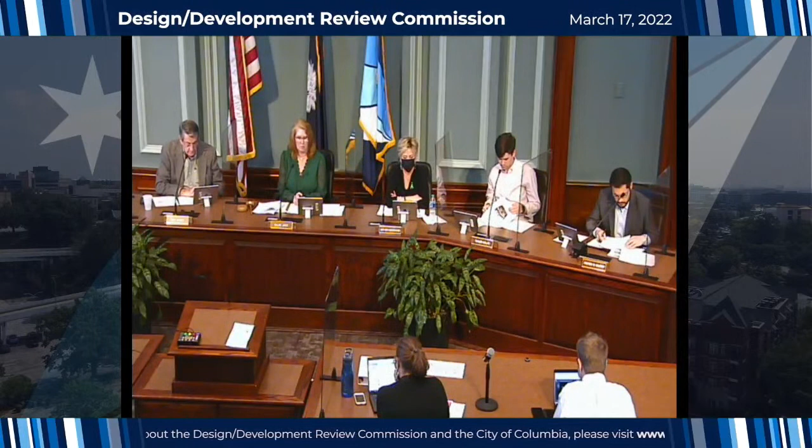And I will call the roll. Ms. Branham? Here. Mr. Broom? Here. Ms. Jaco? Here. Mr. Salibi? And Mr. Wolf? Here. We have quorum.

In order to avoid ex parte communications, DDRC members are under strict instructions not to discuss cases under consideration with the public or with each other outside of the public forum. The meeting typically starts with staff calling the case, giving a summary of the project, and then calling on the applicant to present if they wish. Decisions are typically made in one evening. Decisions may be appealed within 30 days to a court of competent jurisdiction. Oaths will be administered individually as we hear either from applicants or from live speakers.

Applicants with requests before the DDRC are allotted a presentation time of 10 minutes. This time should include, but is not limited to, an overview of the project, case history, and any pertinent meetings held regarding the request. The time also includes all persons presenting information on behalf of the applicant, such as attorneys, engineers, and architects. This time limit does not include any questions asked by the DDRC or staff regarding the request. Members of the general public are given the opportunity to address their concerns in intervals of 2 minutes. Applicants may have 5 minutes to respond. Staff has a timer and will make presenters aware of when their time has expired.

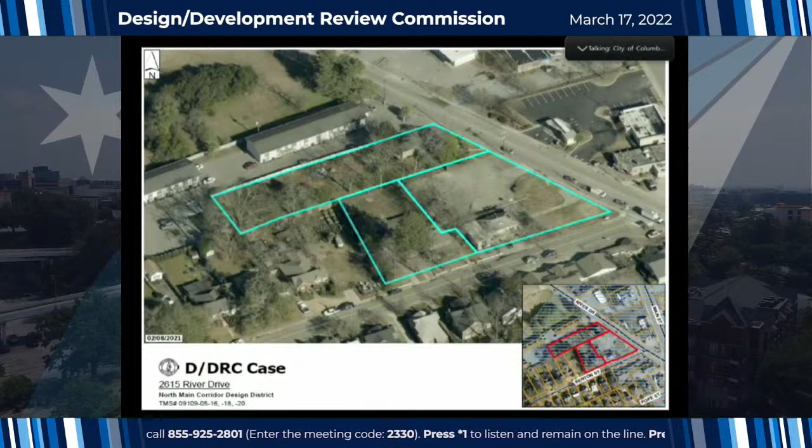The building is V-shaped, with residential units above parking on the ground floor and some surface parking in the rear along the north property line. The project received conditional approval at the Planning Commission for a site plan on March 10th. I'll read through some of the staff comments and the staff evaluation, and then I believe the applicant is here to present the project in more detail.

Under site planning and parking placement, the building is primarily sited appropriately, addressing the street frontages and the acute angle shape of the lot with narrow setbacks in the building footprint. While the surface parking is largely screened from the right-of-way by the building, the ground floor is mostly parking behind metal screens in place of storefront.

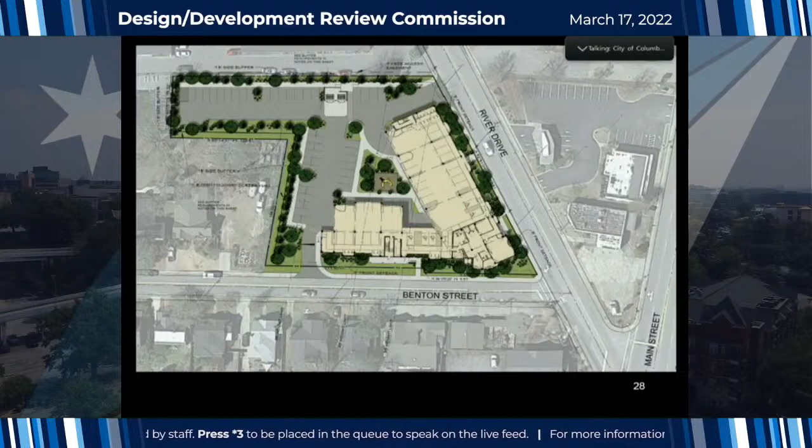Building design and height: the building height and stepbacks do meet the requirements of the Unified Development Ordinance and the neighborhood compatibility standards. For building orientation and elevation, the buildings are parallel to the primary street, River Drive, as required. Both street frontages have a strong brick base and start to establish a rhythm of bays with recesses, but the frequent change in materials appears haphazard and detracts from the concept.

Alternating solid brick bays with punched windows and visually permeable bays with balconies and siding would be a more consistent design concept. This could likely be accomplished by moving brick material from the rear elevations to the front without requiring additional brick.

While the north and west end elevations provide fewer features, some fenestration would help articulate the large expansive wall, particularly on the north end, where fenestration would not be adjacent to a single-family residential lot.

Under corner articulation and entrances, given the acute angle and high visibility of the River Drive and Benton Street intersection, the building does not have an architectural feature or entrance to emphasize it. The entrance on River Drive has a small canopy with visually undersized supports. Having a perspective of this corner would be helpful.

Facade elements: the proposed materials are acceptable. However, the building concept would be stronger and more compatible with the district if the palette were reduced to 2 primary materials on the street facades. Brick and horizontal cementitious siding are seen more frequently in the district and in the neighborhood.

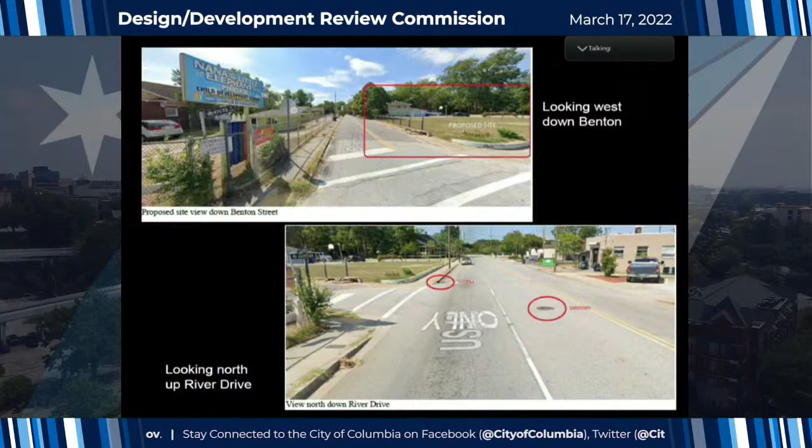So we have various photos of the site here.

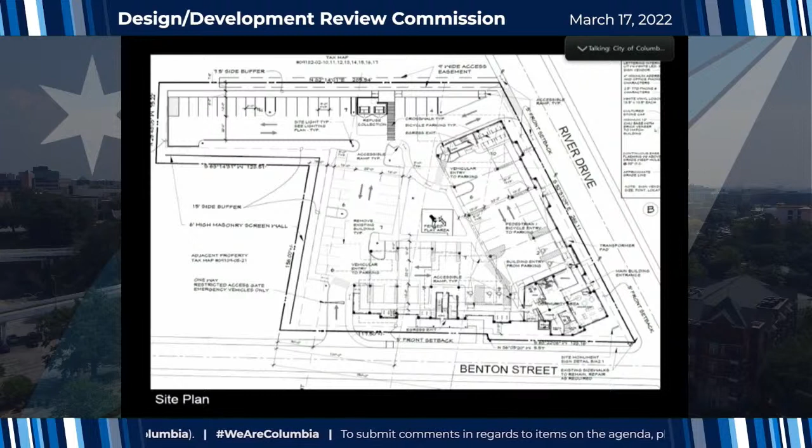This is the site plan showing parking under the podium, pedestrian access off of River Drive, the main building entrance towards the corner on River Drive. There's an egress exit along Benton Street, and refuse collection towards the north there, and a fenced-in play area towards the middle green area.

There's a one-way restricted access gate off of Benton Street. This is for emergency vehicles, and it would be restricted to just that. The main entrance for vehicular traffic is on River Drive.

And there are 5 handicap parking spaces. We have 3 accessible units. We're only required 3 by the ADA code, but we've provided 5 because we will have visitors, and we want to provide access to parking.

Make sure you get into the microphone. All right, okay, yeah, thanks. Thank you. Okay, yeah, go ahead.

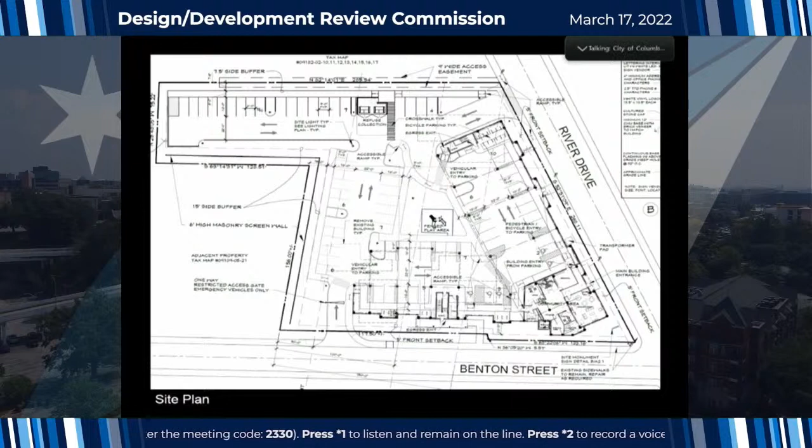There is a 15-foot side buffer that we are getting reduced by adding what was a 6-foot masonry wall. I think in the planning review, we have gone to an 8-foot masonry wall, or perhaps a combination masonry with a wood cap.

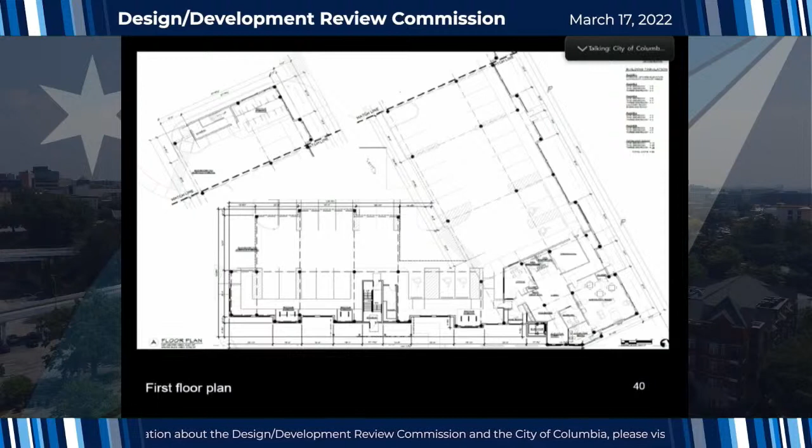So this is the enlarged plan of the building. There's a match line up there, it wouldn't fit all on one sheet. The community and common areas are at the corner of the lot on Benton and River Drive, consisting of an office, a mail room, mailboxes, elevator lobby, computer room, community room, public restrooms, and a mechanical room.

Sir, pause just 1 second. Technical, are you back? Okay, all right, sorry, go ahead. Yeah, no problem, I noticed there were some screens bleeping, so I wanted to make sure everybody could see. All right, thank you, okay.

So that is the ground floor plan. It is a podium building, so the bottom floor is concrete, post-tension beams, and then above that are 4 stories of type 5A wood construction units. There's an elevator shaft at the core of the community building and 2 exit stairs, one towards the north of the site and one along Benton Street.

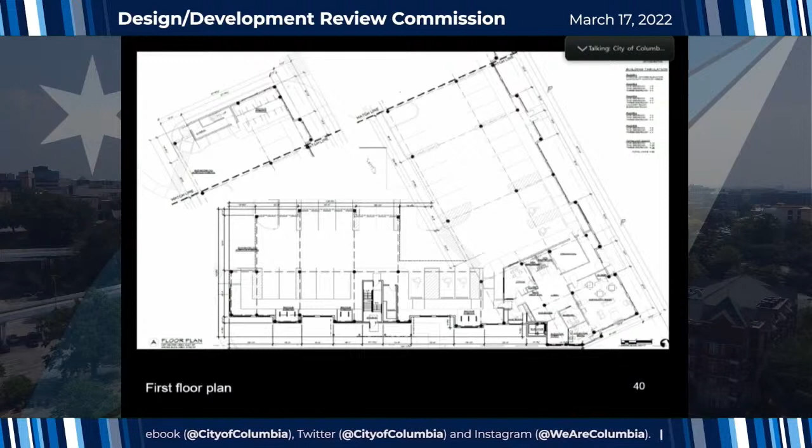We're showing the required bicycle parking in this plan along Benton Street and up towards the north at the River Drive entry.

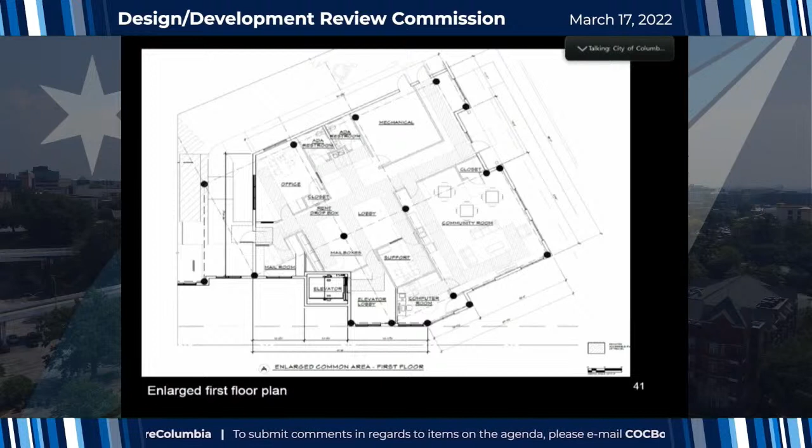So this is an enlarged view of the common area plan. You can see the community room, computer room, support office, elevator lobby, mailboxes, mailroom, the management office where the rent drop box is, the ADA restrooms, and the mechanical room.

Here we have the elevations. This consists of brick and Hardie plank and vertical and horizontal siding. The community area that you saw on the plan at the corner of Benton and River Drive has storefront windows on them. On the bottom elevation, you can see the main entry has brick all the way up with a portico porch.

Along with that, as you move down River Drive elevation and both Benton Street and River Drive elevation, as you move away from the community building, what you're looking at is openings into the parking area. We wanted to screen that to some degree, so we have die-cast metal screening along those windows. They start at where you see the panes, where that red car is on River Drive. To the right, those are all the screening openings. And then you can see the door that provides access for pedestrians and bicycles into the parking garage itself.

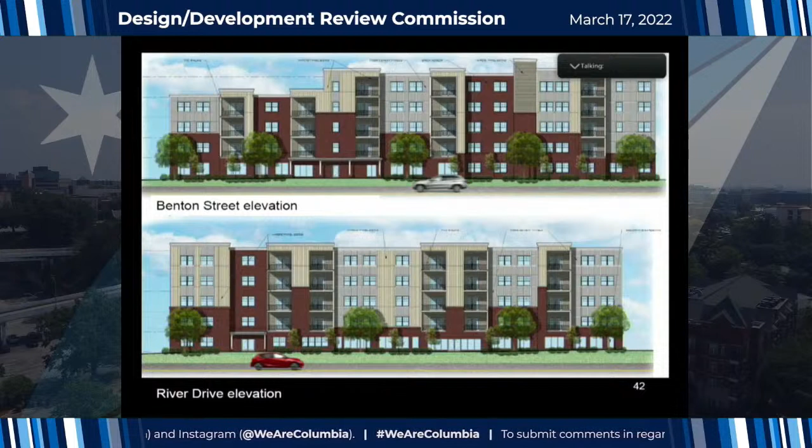Can I ask a quick question about what you just mentioned? On this elevation, on both elevations, primarily River Drive, are you saying that those openings to the garage, to the underneath parking, are screening elements, not glazing? We're open to suggestions, but right now we have like a hexagon metal punched metal screen in those openings. Okay, thanks, just wanted to be sure I was following.

Did we get unstuck? Yeah, bear with us for just a second. Okay. Is everybody's screen working?

We're showing four materials: vertical Hardie plank, horizontal Hardie plank, Hardie panels, and brick.

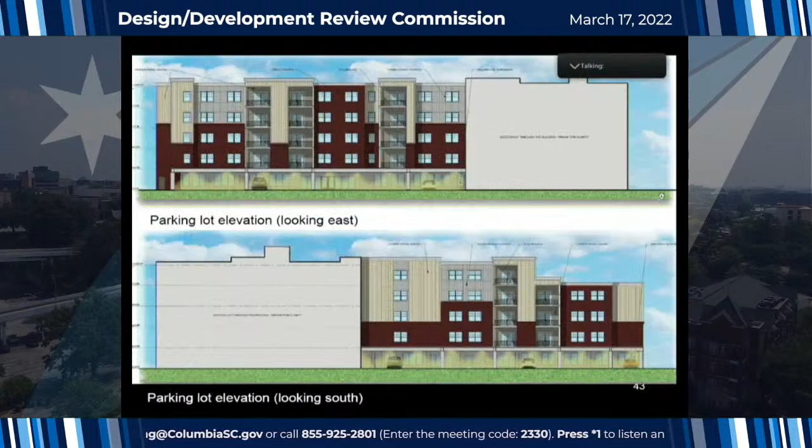Right now you can kind of see into the parking garage. Did we skip something? Did we skip one that shows the back parking lot? Elevations, maybe not. Yeah, the other way.

So these drawings, question, do match pretty much what was submitted, right? They appear to so far, right? Correct, yeah, all yes, right. Just making sure I was understanding it.

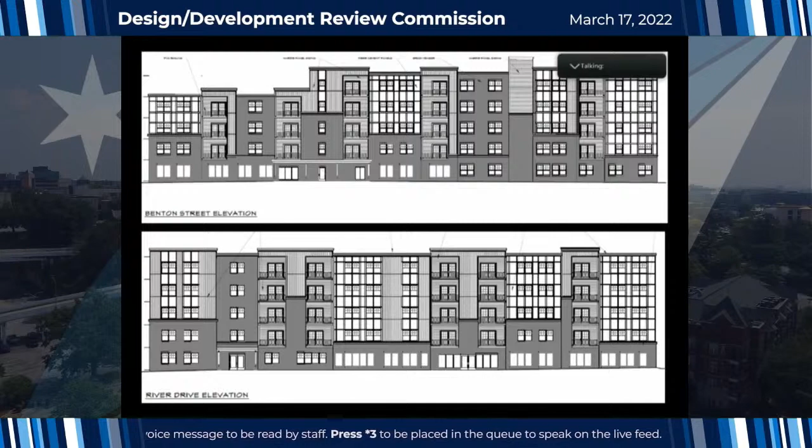All right, there we go. Okay, yes, so this is the backside of the podium building. You can see parking - what you're seeing underneath there is lighting in that area. And you kind of see out to River Drive. You see the windows and the pedestrian access door on that top elevation.

And I appreciate the comment, the cost-saving comment, to take some of this brick off and move it to the front River Drive elevation - my construction team really appreciated that. You can see the patios with outdoor storage.

The next one - these are the short end elevations that contain the egress stairs. The north end has the egress stairs, and the west end is the closest elevation to the protected property, so we've limited a little bit of any views out there. That door you see is access to the lower portion of the height-restricted area along Benton Street.

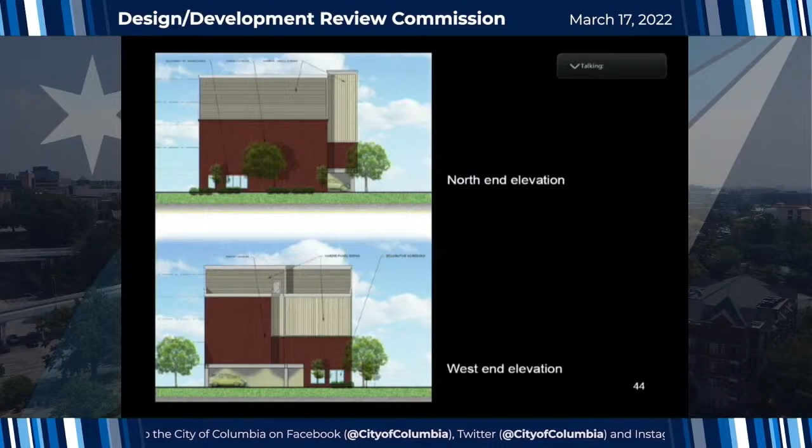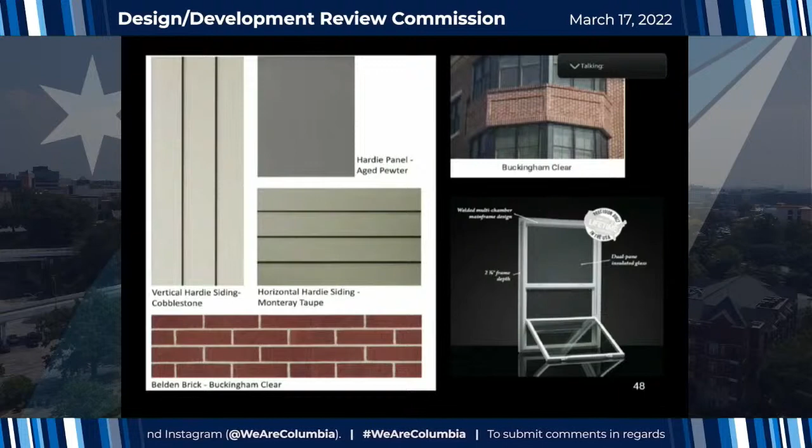Ready for the next? And these are just non-colored elevations. Here are the materials that we put together in the package: the Hardie panel, the horizontal Hardie siding and vertical Hardie siding, along with Belden brick, and also the vinyl windows that we use typically.

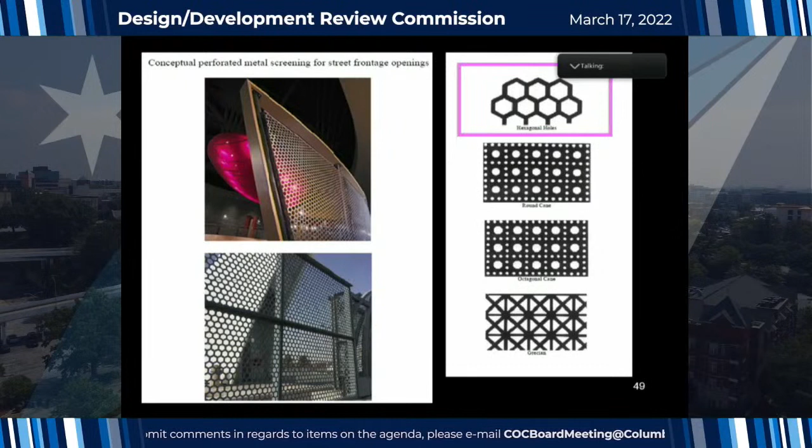And what's the finish on that? Well, it could be bronze to match the rest of the windows. There would be a frame around it - it would look like a window with a screen in it. So to clarify, the windows are bronze and not white like you put in the packet? We show them white, but we will abide by the recommendations of staff and make them bronze. Okay.

And we're open for any kind of finish on those screens.

Is this all of your slides? I don't know if it is or not. Is there one more? Well, I'll ask a question while they figure that out. Go ahead. All right, so I had a question - pretty much all the staff comments and recommendations, did you have any issues with any of the recommendations that they listed here? Nope, they're all valid, and we will work with staff to make sure we meet those.

I think it's a rock and roll kind of elevation, but I think what they want is easy listening, so we'll kind of move to that.

Let's go back to staff. Is there still more slides, or? I'm sorry, we were having technical difficulty. Can you just, the last request - I missed what the question was? I just asked the question while y'all were trying to figure out the technical issue - if they had any questions or concerns with the recommendations staff had, and he replied that he didn't, and then he could work with staff on that.

Thank you. That was probably my biggest question when I saw this - not knowing if you were coming in with different material today or the same that had been presented. So that was my main question.

Thank you. Is there more to show? This is the end of the slide presentation. If you want to go back to something, but we're going to have to pause the presentation in order to get our public comment.

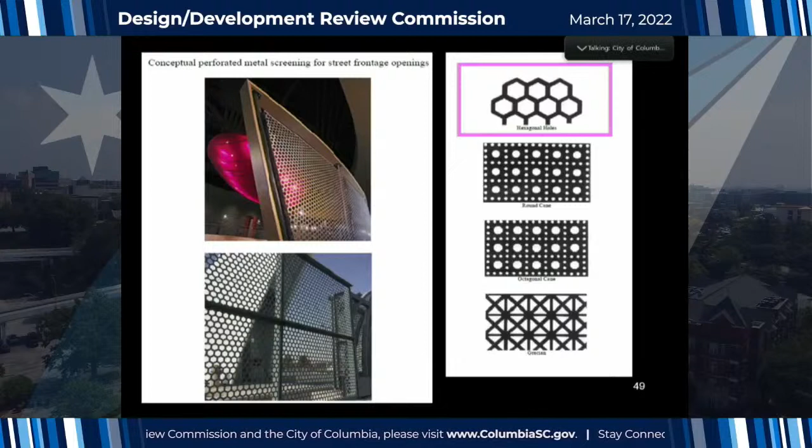We're good? Okay, so I guess we're having some technical challenges, but if that was, okay, that's the last slide that we have for this, I believe. But we can go back to any of the slides if you want to discuss anything in particular. So I'll probably open it up now to the DDRC members and see if anybody has any other questions in addition to what's already been raised.

So I would just like to really reinforce the comments from the staff. I'm very concerned about the aesthetics of this facility. I'm thrilled to see more development happening out North Main, but this needs a lot of massaging to make it feel better.

If you're really willing to work with the staff on this, I'm not so opposed to 3 different materials, but there's got to be some consistency in where you place those materials. We have a combination of horizontal and vertical planes within the patio areas, and all that needs to really be cleaned up a lot.

Yeah, we will definitely work with the staff to adjust those.

The corners are really in need of a lot of work, and looking at how to handle that correctly. I appreciate that one of them's facing one of the property owners, but you really have to try to make that as aesthetically pleasing as possible.

We've actually discussed that, and we will be adding windows in those stairwells, except on the protected side, where we would probably use spandrel glass windows, just to break up the monotony of that facade. We will put some openings.

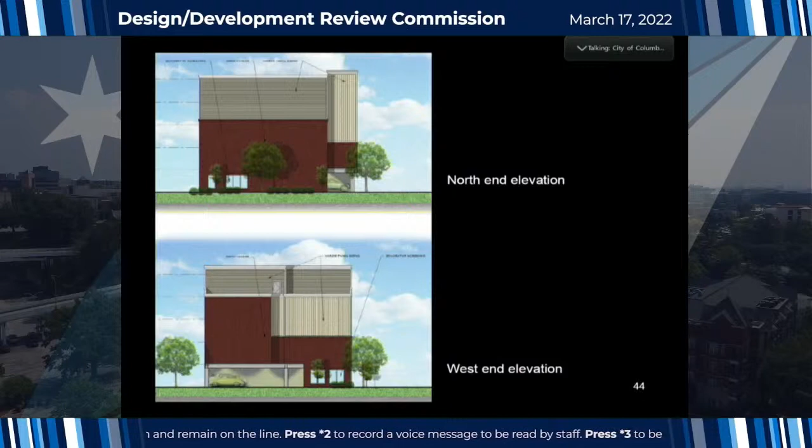Just as a general question, I know this meets the requirements of the height guidelines by the new regulations, but what's really compelling to me is where you get down to the 4-story component. I'm assuming there's no way to make this entire project more of a 4-story height for this area.

Not without losing units. We have a commitment to affordable housing to make sure we have that unit count, and there really isn't another way to do that.

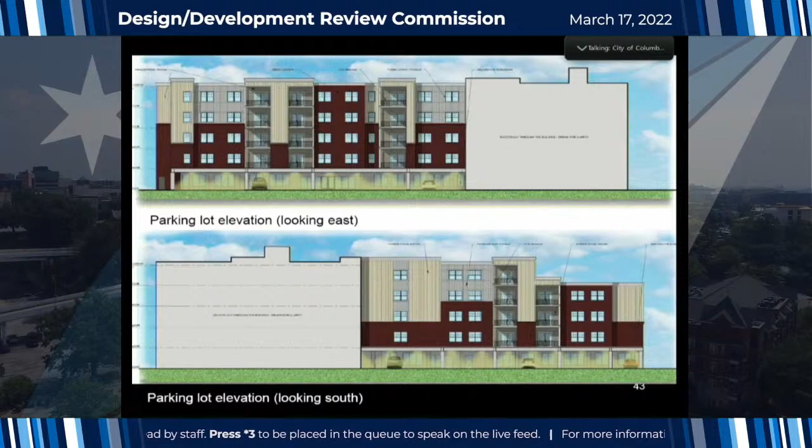Can you go to the Benton Street side, or actually go to one of the plans? Let's go to one of the floor plans that shows those setbacks. Well, you can actually see them here.

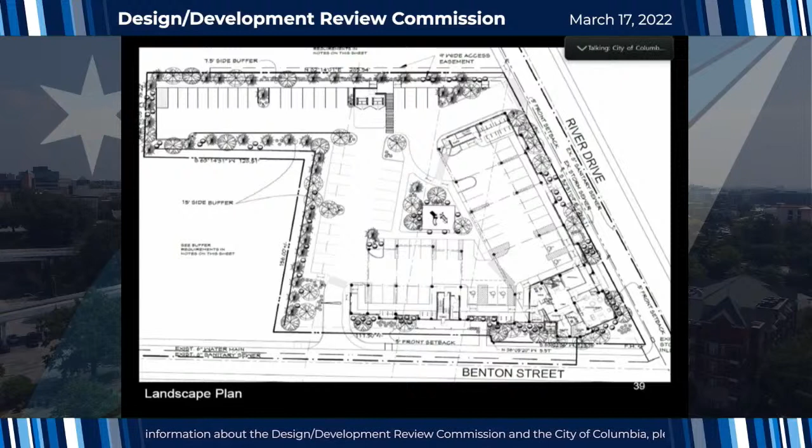Those light lines - there's a 35-foot height limit at that first light line that crosses from Benton Street to the north, 45 at that line, and then 55 at that line, and then past to the corner it's 60.

So what you're telling me is because you've got this requirement by the unit count, you've looked at options for maybe turning the corner again to keep it at the 4-story instead of - correct. So can you go to like the 5th floor plan?

Okay, yeah, there really isn't a way to reduce the height without losing units that we're committed to.

I've already looked at the plans, but thank you. And we do fall in line with the height restriction along there.

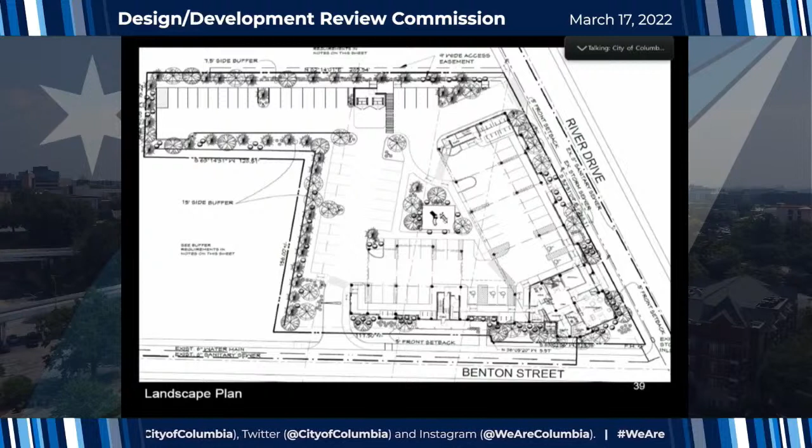I'm aware of that. That doesn't - just because it falls within code doesn't mean it's the right approach necessarily, but at the same time, we want to be sensitive to the neighborhood and the aesthetics there.

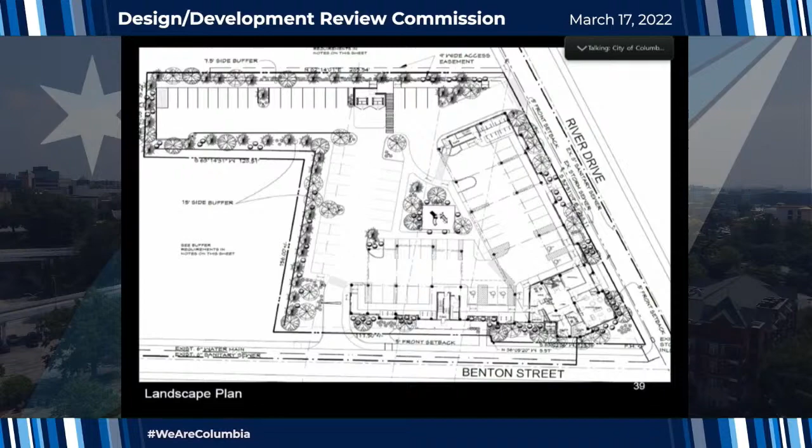I do think that corner element really needs to be looked at, it's just so complicated, that corner element and how it's addressed. I think one thing that would help us when you go back is to actually produce some 3D renderings so we can really get the sense of what it's feeling like and looking like in its context.

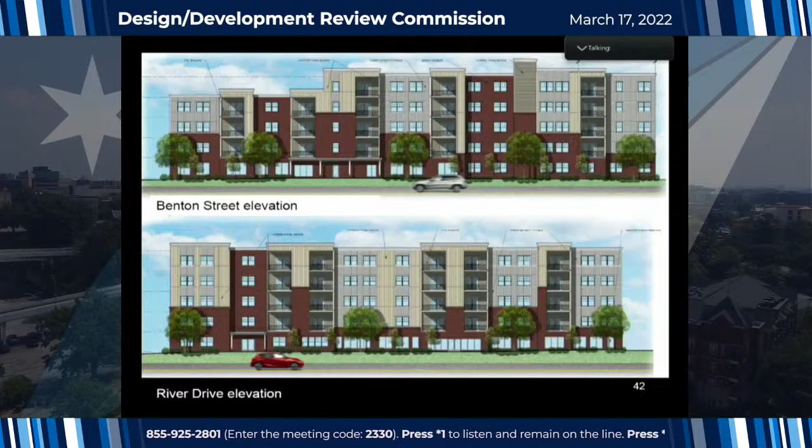And I appreciate that you've handled some of the attachment to the street front with landscaping, but I would encourage you to make that a priority in terms of how you address the street, to soften that as much as possible. Can you go to the color site plan? You're doing awesome, by the way.

So, yeah, we do have a lot of street trees but we can add more. That is not an issue at all.

I am a little curious about that one point right there on the corner that isn't 10 feet back to meet the height requirement. It looks like it's 5 feet back as opposed to the rest of the facade that's 10 feet back, right at that corner, near the elevator on Benton Street. Yeah, I think it's 10 feet from the back of the sidewalk is how the code reads.

But you're right, it is at the 5-foot setback line, just at that small portion, but it goes up more than 45 feet, whatever that requirement is. I thought the requirement was 10 feet from the back of sidewalk, not necessarily from the property line. The setbacks are measured from the property line. Okay, well the setbacks are, but that requirement of the 10-foot upper floor setback - maybe staff can clarify that to be sure, because that's the tallest part of the building, and it's closest to the street, so I was just curious about that corner. We'll definitely take a look at that, thank you.

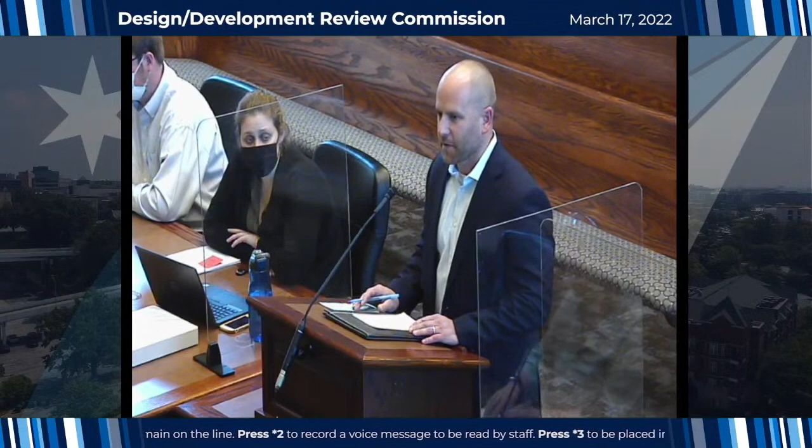Good afternoon, my name again is John Wilkinson. I'm serving as president of the Elmwood Park Neighborhood Association. I'd like to start by thanking Parker and his team at Woda Cooper. They engaged with our neighborhood very early in the process, and before even getting to the planning hearing or this hearing today, had already incorporated a number of our requests and recommendations, so we're thankful for that. As it relates to design, the biggest concern we've heard from our neighborhood and our neighbors is simply the size and height of the project. That's been addressed today, and I'm sure is addressed in some of the other comments that will be heard.

It's fairly striking, a 5-story building next to the adjacent single-story homes. And while we understand the ordinance may allow for it, our neighbors would prefer something shorter. So aside from the size of it, we're generally in agreement with the recommendations from staff and with your recommendations today as well. That's all we have, so thank you.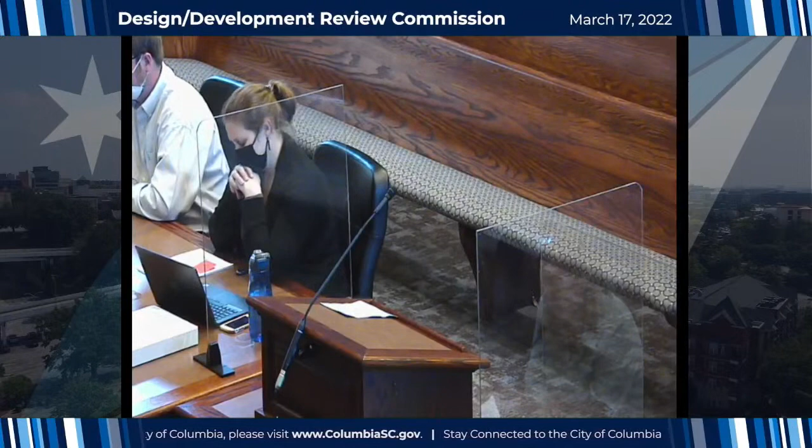I live adjacent to the proposed development. My home and business have been located there for over 20 years. I understand that the height is in the zoning, and so it's allowed, and I think that we all, as neighbors, can share the concern of having a building this size. I have followed along with this process.

I understand that these gentlemen have a minimum number of units they need to have in order to make money and get the tax credit. I feel that fact really speaks to the core issue, which is that this isn't a project ushered in by local developers who had enthusiasm for our neighborhood and our community and making it more walkable and bikeable. I think this is an instance of capitalism, where we're being presented with something that allows somebody who's not invested in our community to cram as many people onto a small piece of property. I understand that's my opinion, but it's an overview of how I see it, as somebody who lives and works and believes in the redevelopment of downtown.

I am also a resident of the neighborhood and have been following along with this. I also understand that while the height is allowable, when the overlay district was approved, this neighborhood looked very different. In the past 5 years, we've had an extreme amount of new single-family home construction. Properties that were primarily multi-tenant have been converted back to single-family. We've had more investment in properties going from rental to primary residence, and we've really seen an influx of new businesses that are 1-story, 2-story.

The most similar project to this in the North Main Development District is a 3-story apartment at the corner of Miller and North Main. That's on a 4-lane street. It's 3 stories, it fits. So I think this development is not impossible to achieve, but on this particular lot, this sizing and massing is enormous.

We haven't even talked about the mechanical on the top. According to the zoning, that has to be a solid parapet, it cannot be screens. So technically, we're adding another half story for all of our mechanical equipment up there, and that's going to increase our shadowing against private neighboring properties.

For instance, the NOMA Flats, the two primary business buildings, which is a market rate, over market rate development, also 2 stories multifamily in the neighborhood, they will be completely in shadow for the majority of the day. When you get to a 5.5 story building, this is the largest and tallest building for a mile radius until you hit Bull Street District and Elmwood. This does not fit the character.

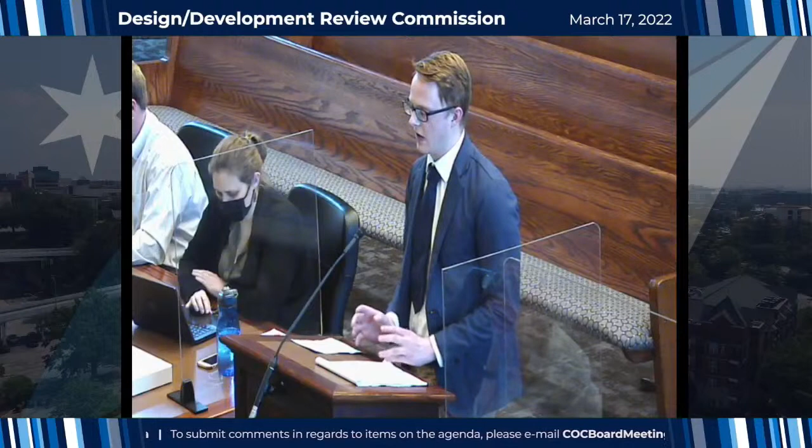Yes, thank you. So to address some of the comments on height, when we initially created this project, we had proposed a strictly 5-story building, and after we met and communicated with the 3 neighborhoods, Elmwood, Earlwood, Cottontown, including a neighborhood meeting, there was concern about the entrance which we initially had on Benton Street, as well as being 5 stories. So part of what we did was maneuver the entrance to be at the north end of River Drive on the property, which shifted the building, and as a result, we also stepped down the building from 5 stories to be 4 stories as it gets closer to the neighbors.

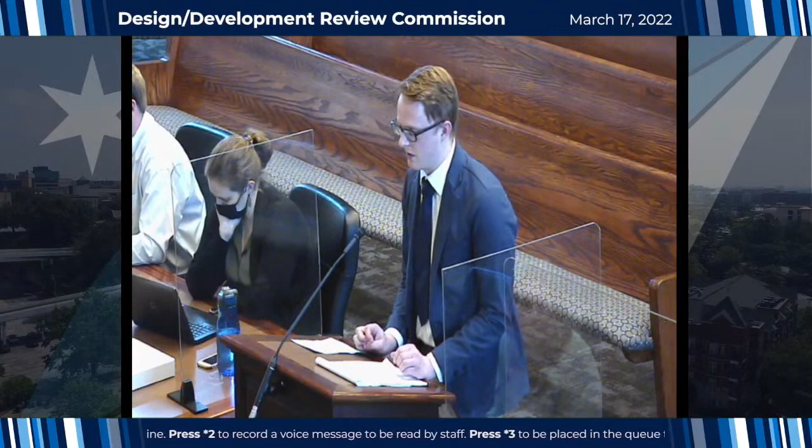Doug had mentioned earlier that part of the reason for keeping it at 5 stories is that we have been awarded the tax credits, which require us to be at 56 units for the tax credits, and that step down from 5 to 4 stories permitted us to keep that while also not reducing the parking too little to fall under the City of Columbia requirements for this district. I think the parking requirements are between 1.2 and 1.5 spaces per unit for this district. Right now we're at 1.3.

So just wanted to clarify that. There was also some public comments concerning how much our company cared about our properties, and I do want to say that we really do care about our properties. Our principals—I've heard stories in the past where the maintenance wasn't upkeeping, so they drove down and mowed the lawn themselves to show the standard we need to maintain our properties to. They tell every developer and every worker that whenever we travel and visit local properties, give them feedback. Two weeks ago, I was in Denmark, South Carolina at one of our properties. We noticed the playground had rubber mulch that started spilling over into the parking lot. We gave that feedback, and within the day they had changed our specifications so we don't do rubber mulch anymore. We consistently improve and make changes to our specifications because we want to be good neighbors. We want to maintain the property to the best of our ability, and we want to be an asset to the community and the neighborhood. Thank you.

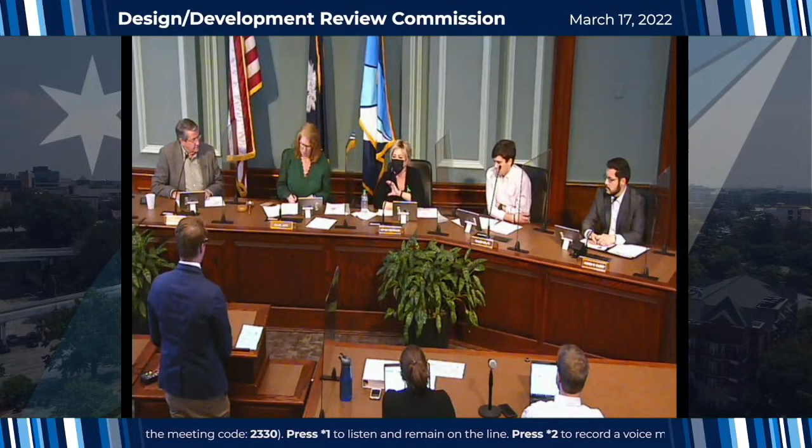I think the issue is the height, and the parking is not only the worst part of the elevation in terms of how it approaches the street, but also adds to that height factor. So if there's anything y'all can do to look at that in more detail, it would be greatly appreciated, along with other potential sites for parking.

We can look at that, but I'm not sure what opportunities exist in the general vicinity to lease or construct parking. We're just suggesting it's worth investigating, since the recommendation to defer this means there's a lot still to be worked out. So we look forward to seeing how it evolves. Okay, I appreciate that.